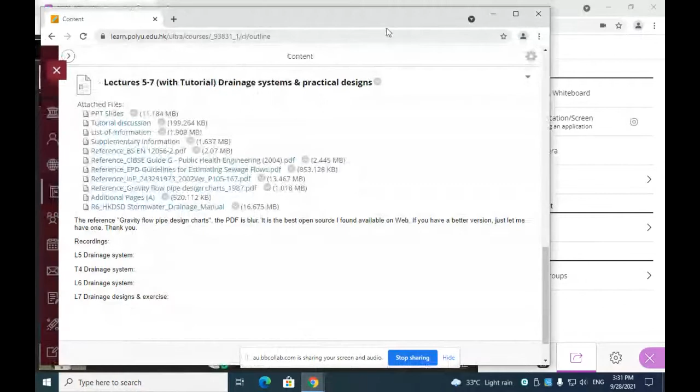For this series of lectures, we're talking about the drainage system, and I put all the information together into one batch, so that you can find all this information from a single location, a single source. It seems there are a lot of files, but only a few I would like to show you during the lecture.

One is the PowerPoint slide, and this PowerPoint slide serves for 3 lectures. Therefore I subdivided this slide into 3 sections: first section for the first lecture, second for the second lecture, and so on. I have also prepared a few questions for tutorial discussion, to be discussed on the 18th, during our scheduled tutorial sessions.

Apart from that, the rest are basically reference materials. One of them is a list of information, which I share with Professor Mui, where all the essential tables and formulas are shown, indicating that for examinations and tests, at least you will have information available as shown in the list of information. There's a minimum of information provided to you.

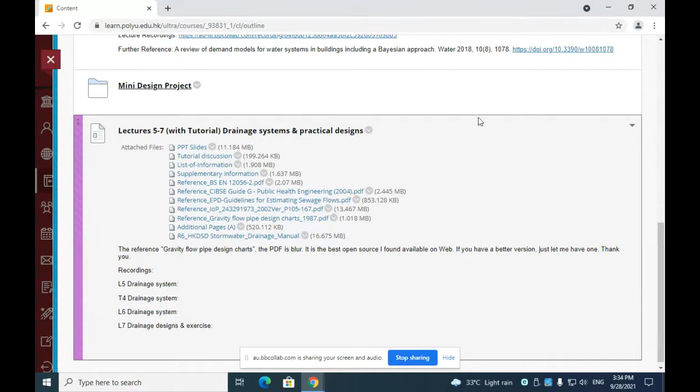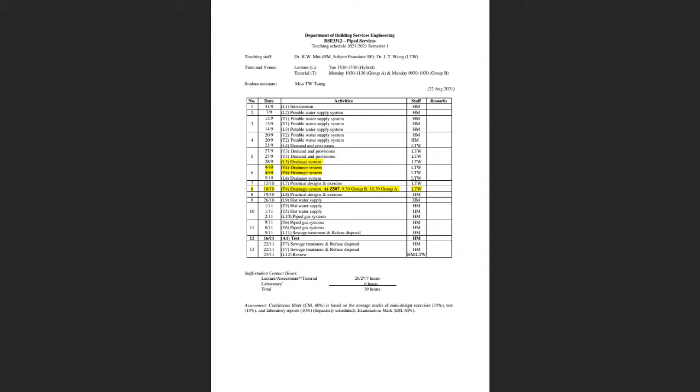Okay, here is the PowerPoint I prepared for today, on a drainage system for buildings.

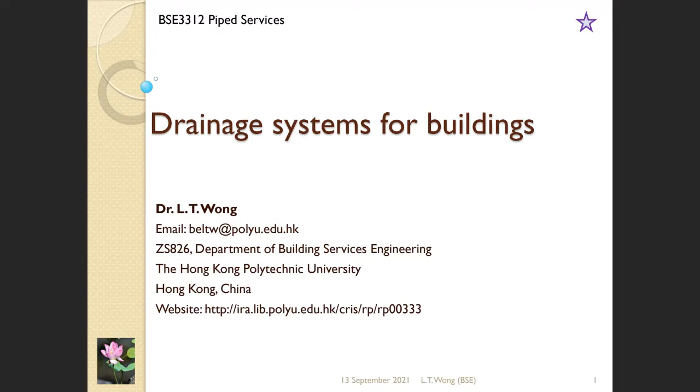Let's go through one by one. Now, we know what's a drainage system. Drainage is basically for a building - we have appliances, we need to use water. All the water comes from somewhere else, and after the application, we will drain out all this water. The drainage system basically helps us handle the effluents generated from our apartments or livable area.

What we understand for a drainage system for apartments: we have the pipes, we have the collecting points. After all the effluents drain out, they go through some process to somewhere else. The entire thing is a drainage from your apartment up to the disposal - quite a huge area. For the building itself, we try to trim the system down portion by portion.

In this lecture, I think we will concentrate on two parts. One is in the building - above ground drainage system arranged for the building to collect effluents from the building. The second part is within the building site, where we need to deliver the effluents to the collecting point - this is underground drainage inside the building site. Basically we have these two parts and subdivisions.

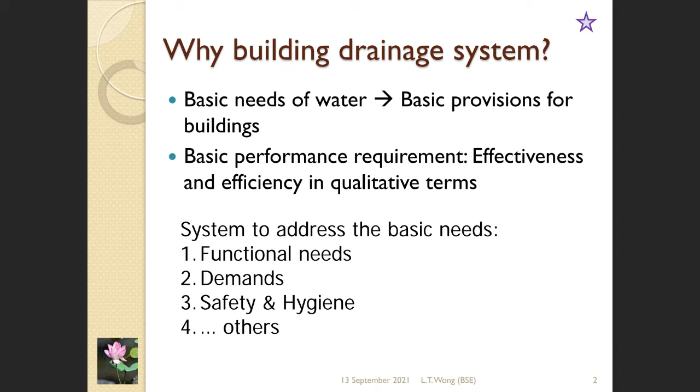So apart from the regulation, we fulfill everything. Sometimes, and most of the time, we will design and arrange the system to fulfill some sort of expectation - the so-called provisional or functional needs. We will quantify all these terms later.

First, we are going to prevent the transmission of foul air or transmission of bacteria and disease into the building. We need to maintain that for hygiene requirement and safety requirement.

The second, we are going to minimize the frequency of blockage and provide adequate pipe access to enable the effective clearance of such blockage, which is a maintenance requirement for a sustainable system.

To provide efficient conveyance of discharge from sanitary, kitchen, and all these spaces and facilities, to enable correct function of each appliance - to maintain correct operation, an effective and efficient requirement.

And where any sewer is likely to surcharge, minimize the risk of flooding. Also maintain good use - normal operation, above ground and below ground level, of course.

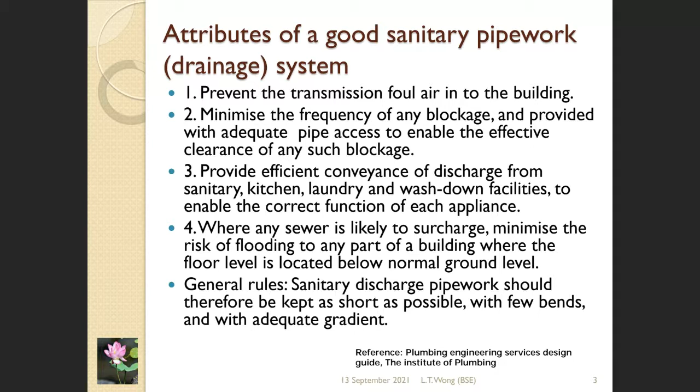Now, for ease of discussion, I would like to subdivide the system into sections, just for convenience purposes - not necessarily subdivided like that. But for convenience, I would like to discuss the system using the ground level and the boundary, dividing it into the above ground part and the below ground part. Why do I try to subdivide like that? Because the flow phenomenon, the discharge behavior, and the fluid dynamics and fluid mechanics will be very different.

For the above ground, mainly the transportation direction is vertical. Below ground, mainly for the slope pipe. It doesn't mean that above ground has no slope pipe - it doesn't mean that, but above ground mainly the transmission is vertical, just for convenience.

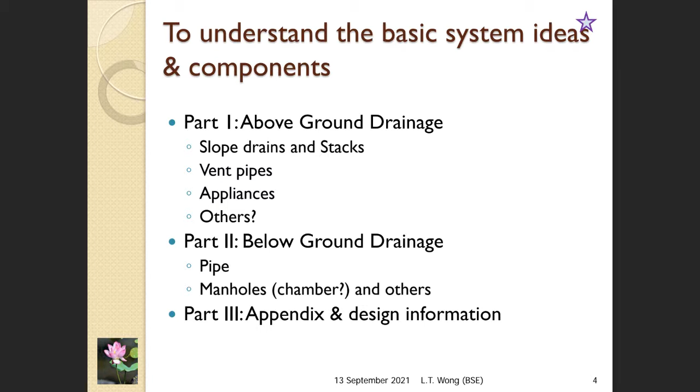Okay, so the coverage and scope of this series of lectures, including 3 parts: 2 lectures and 1 design Q&A, also to show you some design information and a review. Part 1 is above ground drainage today, next week below ground drainage, and then the week after. Therefore, part 1.

The basic idea in the slide showing here is we try to have a brief classification of systems, but the classification of systems is not so systematic actually, at least not systematic to me. When I was a student, I felt very confused about that.

But I try to pick out the basic idea for classification purposes from various textbooks. The first one: the separation of effluents. This is actually for the processing, the further processing. The example shown here is we separate the effluents coming from soil appliances and from waste appliances, whose water quality are very different. One from the water closet, more dirty water - some textbooks refer to this as dark water or black water. From the water closet you may know it's bidet or similar.

In contrast to the soil appliances, we have the waste appliances. Relatively, those effluents are less dirty, and some textbooks refer to those as gray water in terms of color, such as from wash basins, baths, fountains, showers, something like that. The classification of these two is because the processing and handling will be different - maybe handled by different discharge pipes in the building, and then they join together somewhere else, or go to a final destination for different water treatment processes, depending on the final process. But anyway, if we are going to separate the effluents like that, that's the idea.

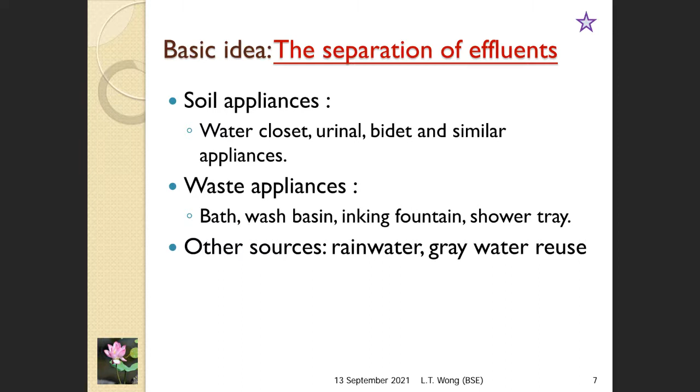Other sources apart from the appliances - we probably have rainwater as one of the sources we use nowadays, and we have some recycled water as well inside the building. So apart from the two different classes of effluents, maybe we have more in the actual building. According to this idea of separation of effluents, we can arrange the system into different outlooks, different appearances, such as the so-called two-pipe, one-pipe systems.

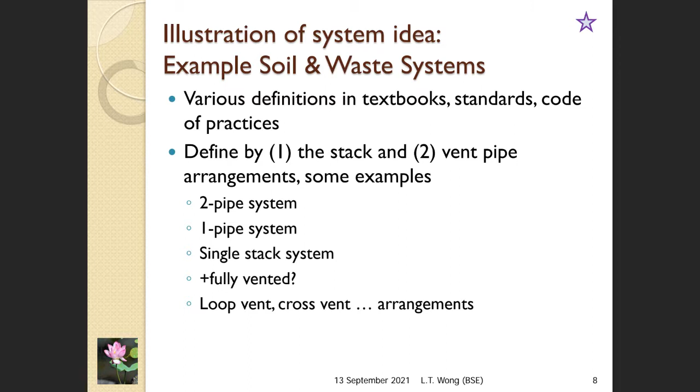I think we'll just go for the example, the so-called two-pipe and one-pipe systems. However, unfortunately, the definitions for two-pipe and one-pipe are not so rigid. When you look at design guidelines and textbooks, you will feel confused. Just to put an example, a very basic idea: if we are going to separate the effluents coming from soil waste and wastewater, this becomes a so-called two-pipe system. The pipe is referring to the drainage stack - a stack is actually a vertical arranged drainage pipework.

And with this, I've got the question - why did they join together finally? The separation is only applicable in this example, applicable inside the building only. The routing for the pipes may go through different locations with different requirements, so that the processing, including the transportation, is different. But anyway, this illustration tries to illustrate the idea of separation of different effluents into two different stacks - the so-called two-pipe system.

In contrast with that, they can be arranged together, becoming a so-called one-pipe system - a single pipe collecting both classes of effluents as well. That's fine, that's okay. I use the screen here - this is a one-pipe system as well. Thank you very much.

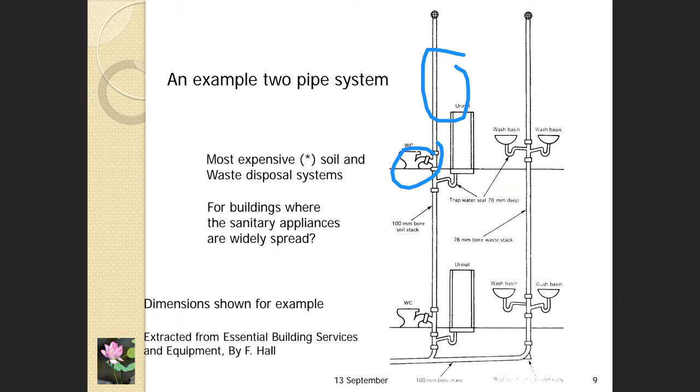Apart from that, here's an additional pipework. This pipework is not for water, no water can flow into it, and this also serves as a ventilation pipe. This additional ventilation pipe is so-called the secondary ventilation pipe. If the pipe is arranged vertically, usually we refer to it as a ventilation stack, something like that.

So we have the basic idea and the components mixed together in order to have the classification of the system.

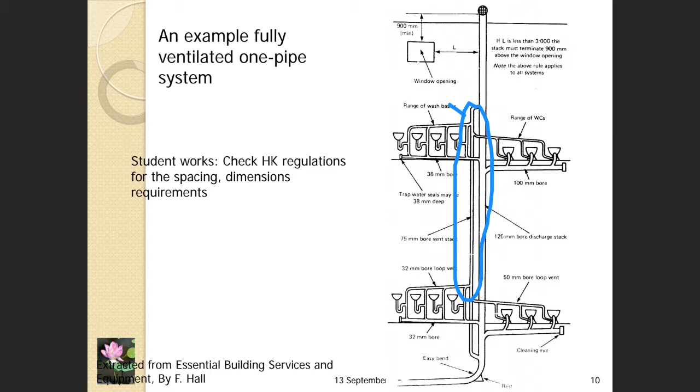Please do not use terminology like 'my design is a one pipe system.' Actually, for a one pipe system, you need to describe further, to better define how one pipe your system will be, because there are a lot of variations.

Okay, we skip this, go to the design guide. I have uploaded the entire design guide I found from the internet. Don't charge me, no copyright - okay, not the copyright.

Now the definition I quote from the Institute of Plumbing, which is a chartered institution, so I think it will have some status. Now, the primary ventilation system - the ventilation is supplied by the drainage stack itself, as arranged in the figure there. All the ventilation from the drainage stack, ventilation is from there. It's primary ventilated. The description is there.

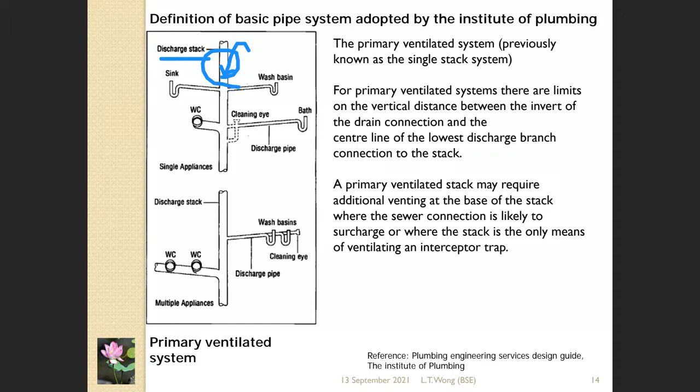Apart from that, we also have the basic piping for secondary ventilation. Apart from the primary ventilation, we are going to have one more ventilation stack acting only as the common connection to the ventilation pipe, could be like that, and to vent some of the locations inside the pipework.

In the case where the ventilation is insufficient, we need secondary ventilation as well. And if arranged differently from the previous one, they call it so-called a modified one. Modified is also a confusing word, not well defined - deviating from the previous one is so-called modified, and how modified it is, we need to further describe.

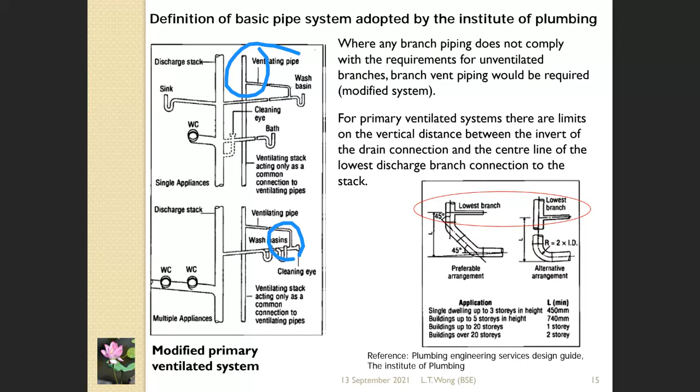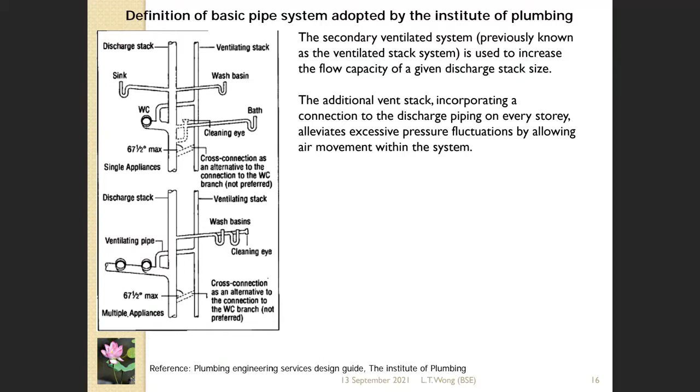Now, the secondary ventilation system - this is a secondary ventilation pipe, and the ventilation connects to various locations where needed, particularly for the WC, as they require much more air. Here's some definition.

The ventilation location could be at the appliances, could be at the drainage stack, could be at the branch pipe as well. So now we've got different alternatives. However, for the alternatives, somewhere has to vent and somewhere not to vent, which we need to go through experimental study to see whether the seal loss will occur.

Okay, for a pipe with a limited length, more than that we need ventilation, something like that. Mainly these dimensional requirements come from experimental data.

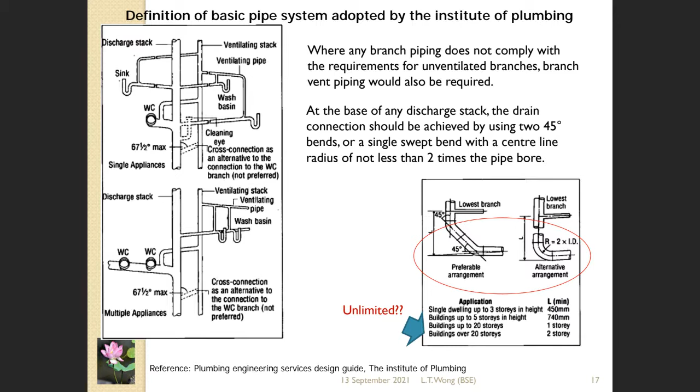Can we calculate it analytically? Theoretically it's almost impossible - some solutions are not available in analytical form, only available in numerical solution. Therefore, as engineers, we will not spend a whole year to solve for one pipe size, but rely on experimental data to design an entire building within one week, things like that. Performance requirements we did mention - simple, safe - so we will not go through it word by word.

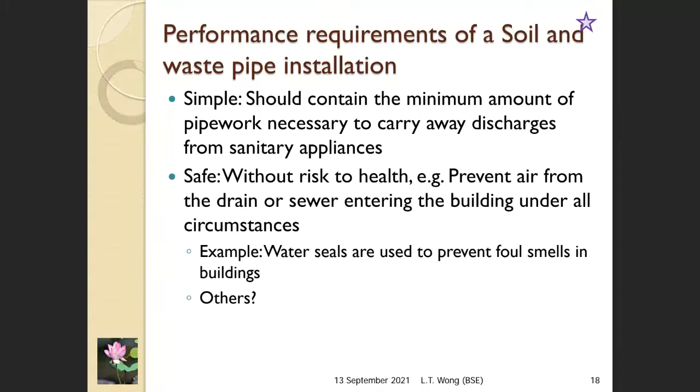Apart from that, we also have some technical aspects. Let me give some more description on these, such as the flow requirements we've talked about, the smell and foul air which require ventilation. I did receive some calls from local developers talking about the bad smell.

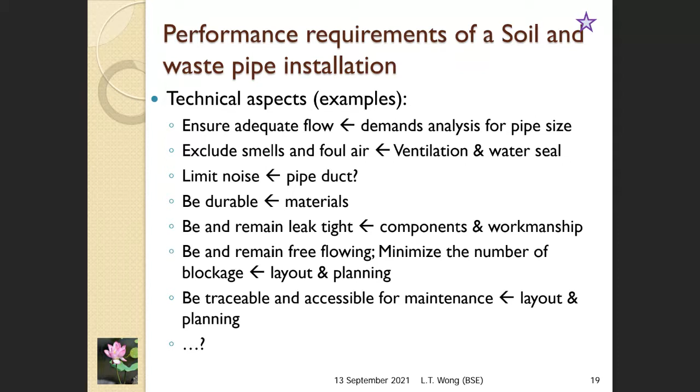Be durable material, be maintenance. We can conduct the maintenance easily to replace the system easily, okay? The system be traceable. We can trace the pipe work, where the pipe works, and once there's a leakage, how to repair. All these are important, subject to these so-called technical aspects.

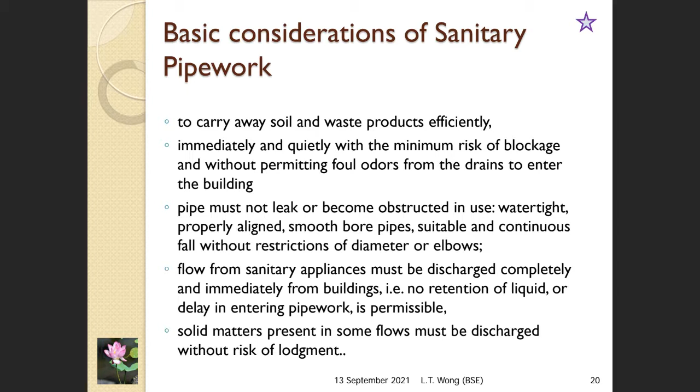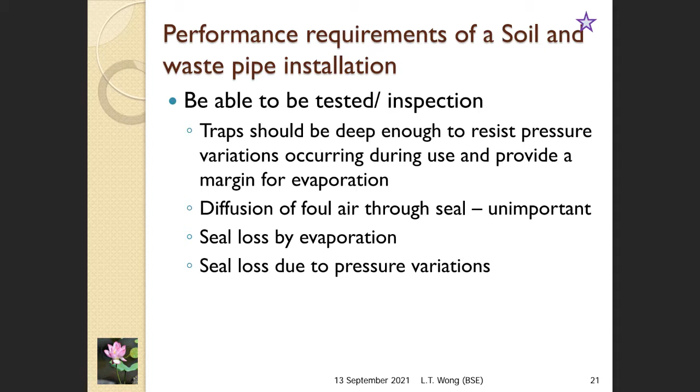Okay, we skip all this. Be testable, okay? We need to provide some space for testing the pipe work, for the leakage, things like that. We skip all this because it's quite detailed, you cannot read the wording.

Okay, now we go to the details about the piping arrangement. For the piping arrangement, we are subject to various philosophies, apart from those basic assumptions and parameters adopted. Common to all those requirements, we will have different appearances of the piping layout. Therefore, I would like to stick to a few layout examples to serve the purpose of discussion.

Here is the example of the piping arrangement in Hong Kong, and we will refer to the documentation detailing the piping, such as the source, the Buildings Regulation. In the Building Regulations, Chapter 123 is the Buildings Ordinance, and the subsidiary 123I, not 1231, which is for the drainage system.

Apart from that, because the Hong Kong legislation system is performance-based, performance-based means it will list down the requirements qualitatively, not necessarily quantified, so that it allows an engineer to, based on engineering principles, provide a solution to address the performance requirements. This is the local legislative system.

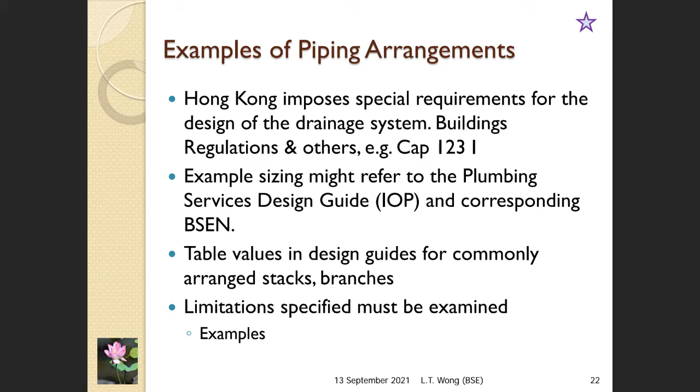Now I'd like to show you information from the British Standard first. The British Standard is interesting - this is the so-called BSEN. Maybe later, because Britain has separated from mainland Europe, there will be no more EN. I don't know, but the point is this documentation, the BSEN, has an objective to provide unification of a standard across borders in European countries.

Therefore, inside the BSEN, they define different kinds of systems and document them so the documentation could be applicable across different countries, different nations, different areas. Okay, maybe I'll jump to the last one first.

Now in the BSEN, they try to classify the system into 1, 2, 3, 4. This is not the classification of the BSEN itself, but system 1, 2, 3, 4 describes the basic underlying assumptions adopted by different nations. For example, Germany, Austria, Switzerland, Belgium will adopt a set of underlying assumptions in order to lay out the pipework.

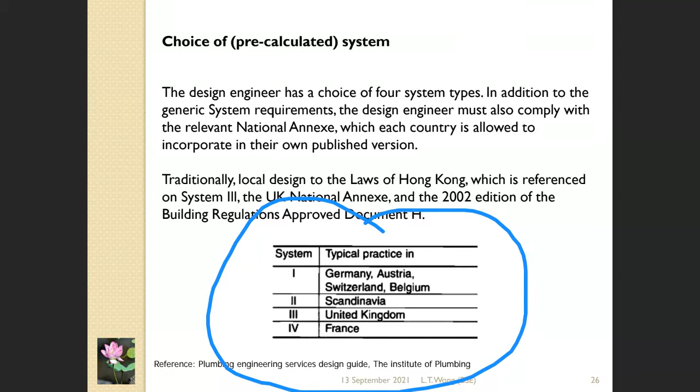For Scandinavia, they have another idea to lay out the pipework. For the UK it's system 3, for France system 4. Maybe for some other countries, system 5 and 6. But basically it's classified into 4 systems, and the differences are based on this.

It's based on the filling degree. The filling degree is the idea of how a branch pipework is to be utilized. The filling degree actually refers to once we have the effluent discharge through the branch pipe, something like that.

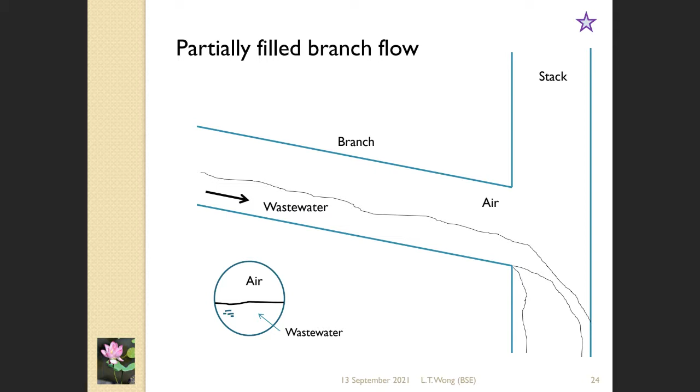Actually, indeed, all the water flowing through the pipe will most likely not occupy the pipe entirely. We allow some space for air flow, and this air serves for ventilation. It could be partial filled flow, not necessarily fully filled. And the area filled up by the wastewater is described by the term so-called filling degree.

If the branch pipe is allowed to fill up by 50%, this becomes system 1. 70% becomes system 2. 100% becomes system 3. Other than system 1 to 3 will be system 4. Therefore, system 4 is not well defined.

Now on this classification, the basic idea is we can appreciate that even the same pipe, same appliances, at different countries you will find this appliance's pipe is smaller. In another area, the same arrangement, the pipe seems larger and longer.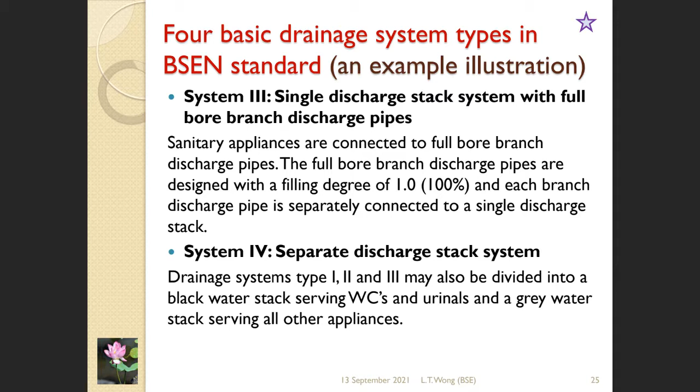Actually, the arrangement is based on experimental study and data arrangement, so this set of design can fulfill the above mentioned requirements. So based on 1, 2, 3, 4, we do have different sets of piping layout. The differences are there. So here we need to confine our discussion, otherwise it's too confusing.

We try to confine later on the British system, and I think it will be easier for you to follow one of the design guides. All right, but before that, I would like to illustrate the entire bigger picture for you.

Now the primary ventilation system configuration, as we mentioned, primary ventilation comes mainly from the drainage stack, and the ventilation mainly comes from the extended part of the drainage stack up to the roof level, above the roof level. The regulation nowadays requires the exhaust point of that pipe opening to be above all the occupied area, at least a certain distance above the roof - 1 meter, for example. But maybe recently we found 1 meter may have some problem.

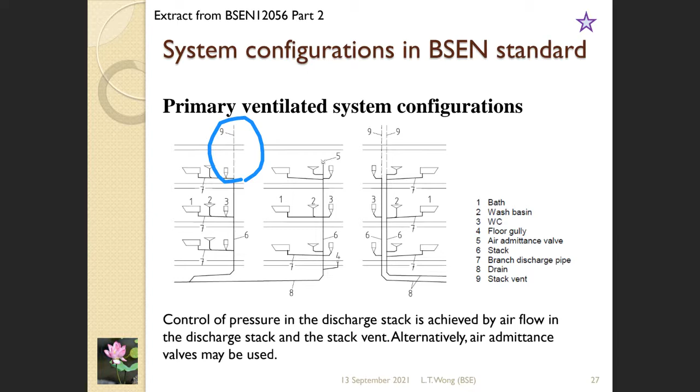Anyway, in the British standard, apart from the primary air from the drainage extended part, it also comes from some components. These components are not necessarily approved by all cities, not universal. This is the so-called air admittance valve - just like a non-return valve, air can come in one way, no air can go out. It puts a physical isolation. This is allowed in some European areas, not for Hong Kong until this moment.

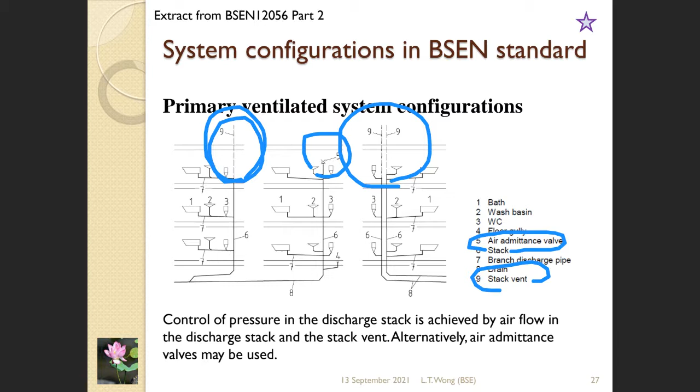Apart from that, if you've got a two-pipe system, the extended stack up to the roof level is called the primary ventilation. So this arrangement is so-called the primary ventilated system. Apart from that, we have secondary ventilation - additional vent pipes are provided. They're joined together because both are vent pipes.

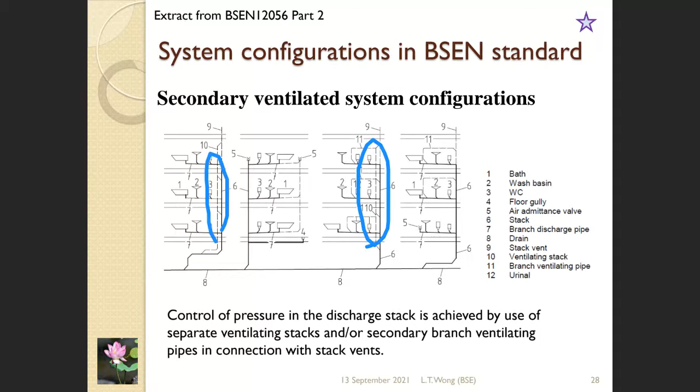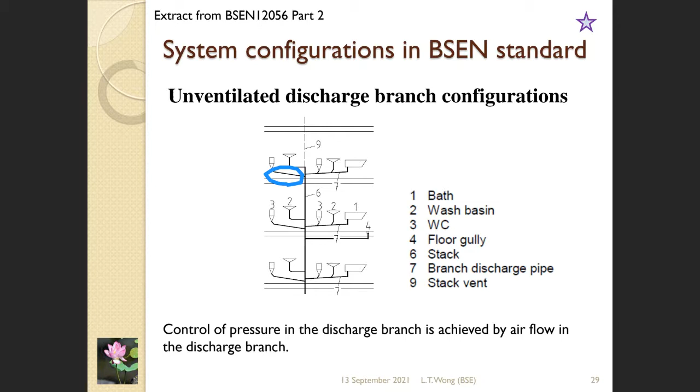Unvented system - unvented parts are not the system. The unvented part we found here is the branch pipe without any ventilation. It's possible, but it has limited length. Longer than that, we have to supply ventilation.

And for the branch pipe with ventilation, it's depending on the length, the gradient, and pipe size. Having ventilation, the pipe can be longer, with less restriction about the pipe routing. With no ventilation, we have more strict requirements about pipe gradient, pipe diameter, pipe length, things like that. So this classification helps us use the correct set of information to lay out the pipework.

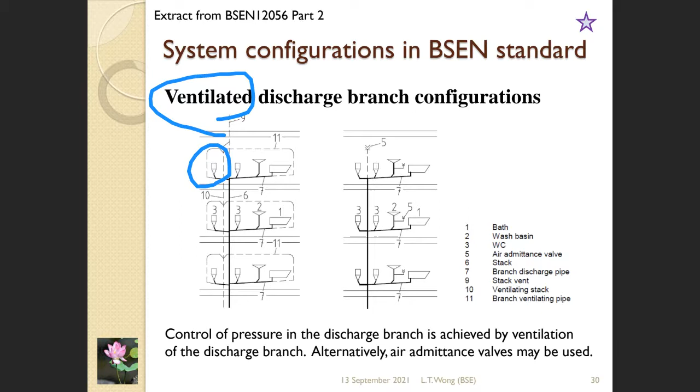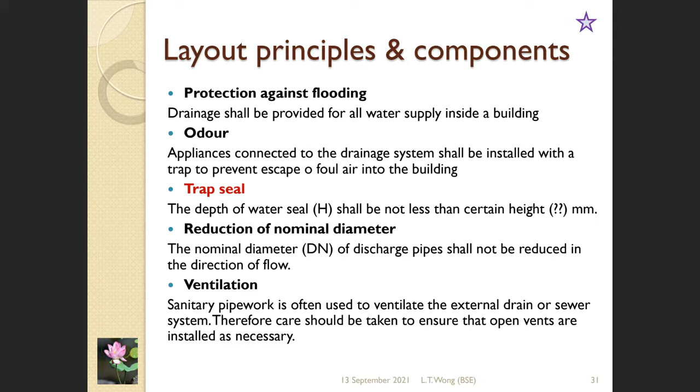And then here we have some list for us detailing the terminology and standards. We skip this. Trap seal highlighted - I will give you more details about that later.

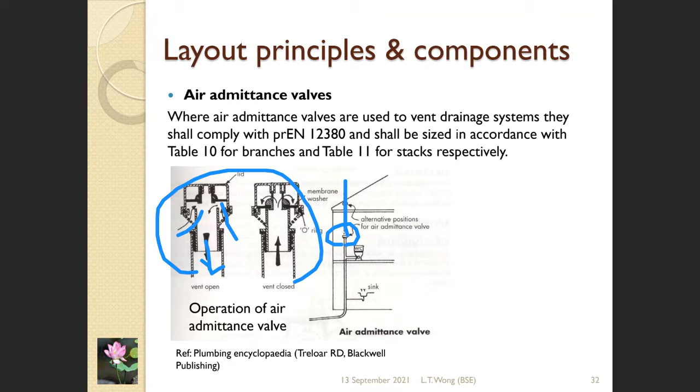Now, for the classification of the system and the layout principle, the layout details will be listed in table form. According to the system arrangement, the system underlying parameters adopted, we have different parameters for the system. Here are some example tables, such as the air flow rate for ventilation and the drainage capacity of the stack.

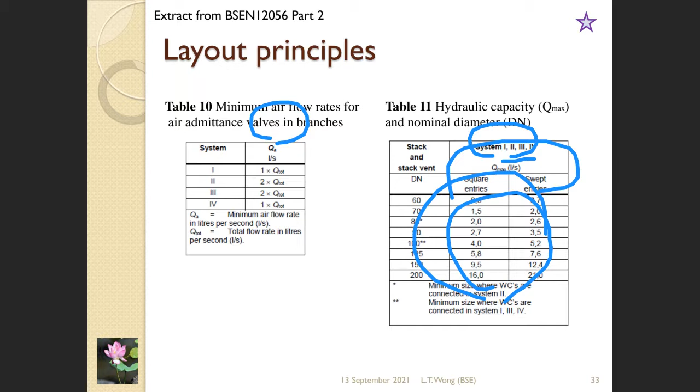For points 1, 2, 3, 4, put them together. In there we have two columns. One column is a square entry, one is a swept entry. You can find the definition for that. Basically, square entry is where the pipe is just fully connected to the stack. A swept entry has a smoother water flow.

Better, it smoothly flows the effluent into the drainage stack. The difference is that it creates less pressure variation, so with less pressure variation, the drainage capacity will be larger compared to the square entry. We are not talking only about the filling degree at the stack, but also the air pressure generated inside the system, so we consider both complications there.

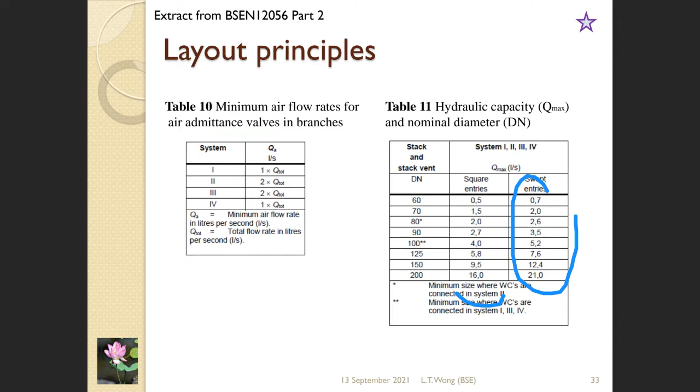Here are some requirements about the waste trap arrangement. The waste trap should basically be close to the appliance, but for some appliances, according to its arrangement, it may be a little away from the point of utilization, such as the shower, where arrangement may not be so convenient at the point of drainage. They are allowed some distance.

Apart from the water seal part, the figures are not shown here - I put an additional information here. Separately, for point number 3, the so-called proprietary valve, it's something like this.

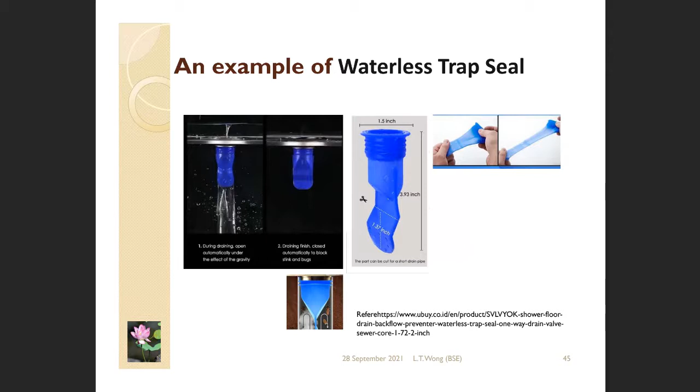Now, the purpose of this waste trap is to provide a non-mechanical barrier to prevent the escape of foul air into the building. In addition, the water reservoir can act as a dilution feature to intercept small accidental drops of objects. The description is like that - let water go, but no foul air in. That's the idea.

There should not be more than one trap - that's the principle still applicable in Hong Kong. We have only one trap between the appliance and the drainage stack. Why not two? Because more traps means more risk of blockage. Once blocked, the wastewater comes out, causing a hygiene problem worse than the additional trap would solve. So this is a balance.

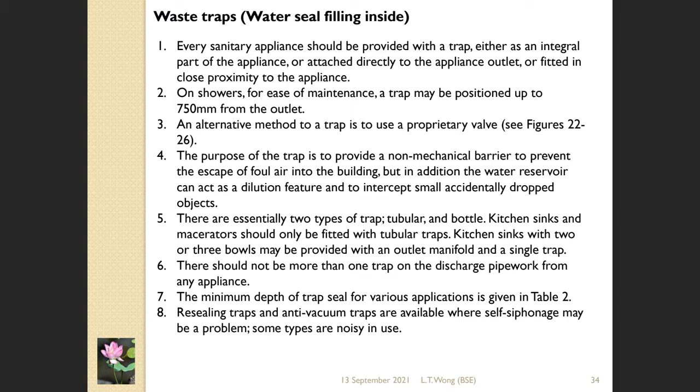Okay, the minimum requirement is 37.5. This is a magic figure. Whatever the trap seal design, after the operation, the water will follow the wastewater to flow, and then resealing - after resealing, we have to maintain the minimum height of water inside the seal.

And this height of water actually will create the pressure of the water column. So that on one side, air pressure variations have to go through this column of water before the air can pass through it. So this height will create a sufficient pressure, and the pressure corresponding to this water column becomes the density of water multiplied by gravity multiplied by the depth, rho GH.

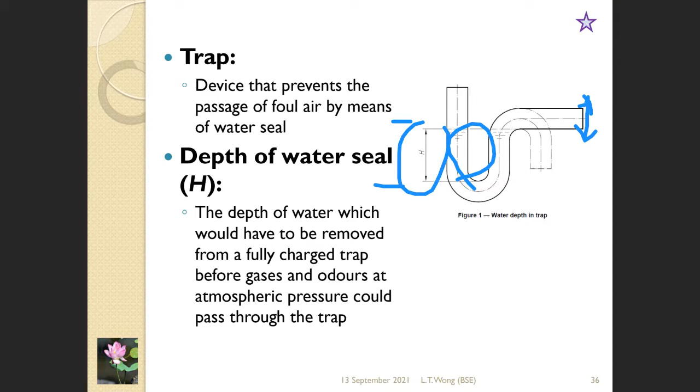Therefore, approximately for the 37.5 mm, it's approximately 375 Pascal, plus or minus. And for engineering accuracy, we will mention, say, around 38.

Okay, why do some appliances have a deeper water seal? Because for others, say for the WC, there's a flushing action. The flushing having quite a large momentum, and this momentum will cause seal loss. Seal loss means some of the water follows the flow and discharges to the stack. Insufficient water to refill, to backfill the trap, so that the water seal drops.

Therefore, the standard for the seal depth inside the trap has to be designed deeper, in order to compensate for those situations having water loss.

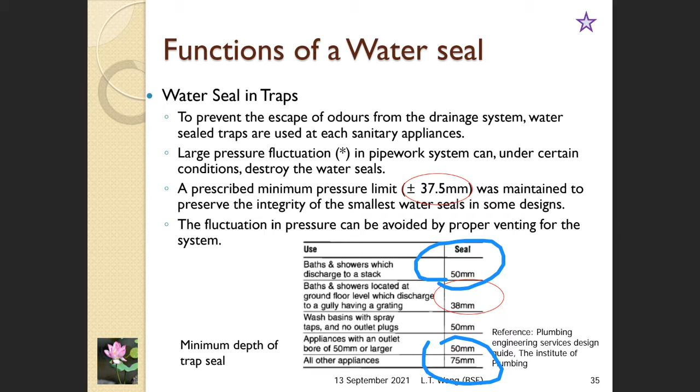All right, we're talking about the loss of water seal. There's a lot of causes. The main cause we have to avoid is siphonage action. Siphonage describes the water withdrawal or water loss due to excessive pressure variation, and these excessive pressure variations can be induced, can be created by the discharge action of the appliance itself.

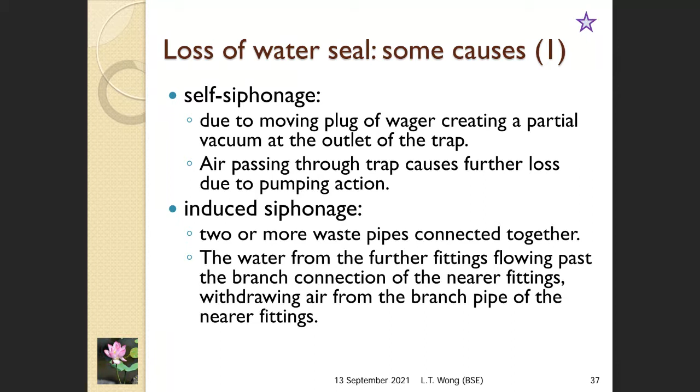The classification here is just a description: self-siphonage and induced siphonage, both talking about a siphonage action. If the siphonage is due to the appliance itself, it's so-called self-siphonage. If the siphonage action is due to the discharge of other appliances - the water seal trap has no discharge, but the discharge comes from appliance A while the siphonage action is created at location B and C - that's so-called induced siphonage. Whatever the case, induced or self-siphonage, the principle remains unchanged, the same.

Now for the discharge action here, with some arrangement of pipe length and gradient, the water starts to flow in. Because of gravity, the water will accelerate, and keep accelerating until the friction created by the pipe counter-reacts at the same magnitude as the acceleration due to gravity. Then the water flow becomes steady, at the same speed, a so-called terminal speed or terminal velocity, which is a balance. Now, because of fluid mechanics, in a partially filled pipe the flow velocity is different from an entirely filled pipe.

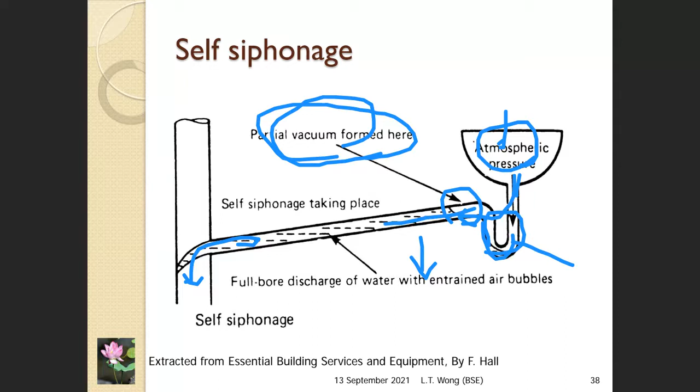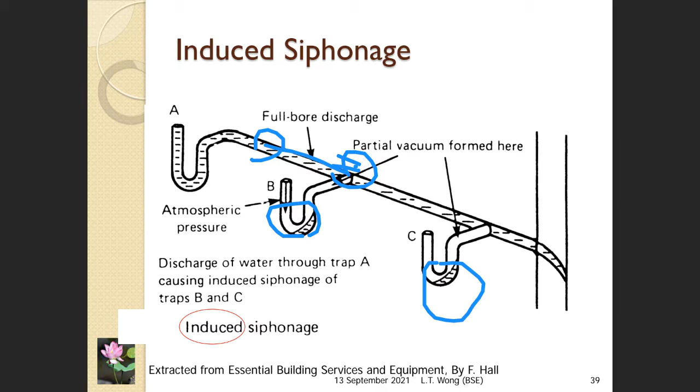Similarly, this partial vacuum area will transport through the pipe, flow through the pipe, such as from one location to a second location. Once the partial vacuum goes through, all the traps will be affected. The partial vacuum isn't necessarily with water - sometimes it's with the air wave, the pressure wave, transporting through the entire pipework. All the seal traps connected to it will be affected.

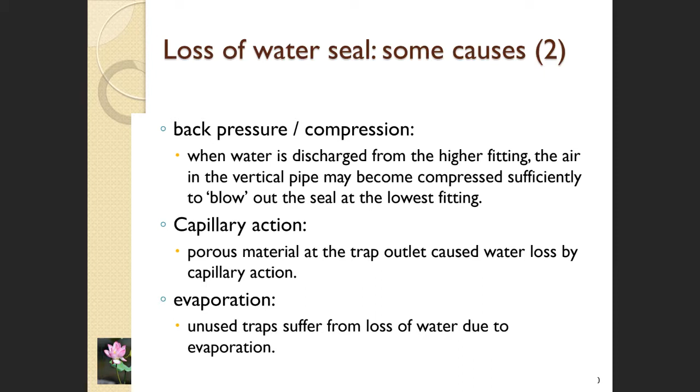Apart from the siphonage action, we do have some other possibilities to the water seal loss, such as back pressure. Back pressure will be okay. We need to ask, where does the pressure originate?

Change of the flow rate inside the pipe. For steady state pipe, usually we do not have pressure transient created, unless we have a change of the flow rate or change of direction. Here there is a change of direction, also change of flow rate. Same flow rate.

Okay, flow velocity, because the water comes here and drops, the terminal velocity is different from the sloped pipe. Also more water comes, and here the flow is slower. This is what we call a hydraulic jump.

Hydraulic jump means there are some locations, some pipe locations, that got entirely filled up by water. So as the water continues to jump into that area, it will create a positive pressure in some area, particularly at the main drain, building main drain at the bend location. Therefore, in the previous table I showed you, at the building base, the bend has to be large or specially arranged in order to mitigate or minimize the effects due to the positive pressure.

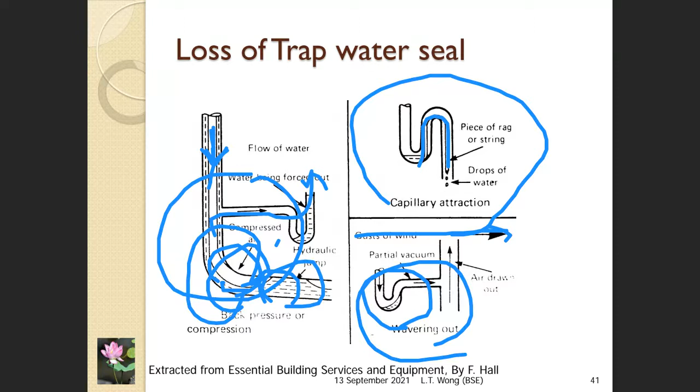Same equation: wind passing through it will create a negative pressure. The negative pressure, if large enough, would affect all the seal or water seal. So just some description for that. Wind pressure, the same equation, rho v squared. V is the velocity of wind, rho is the density of air. Discharging momentum may also affect it.

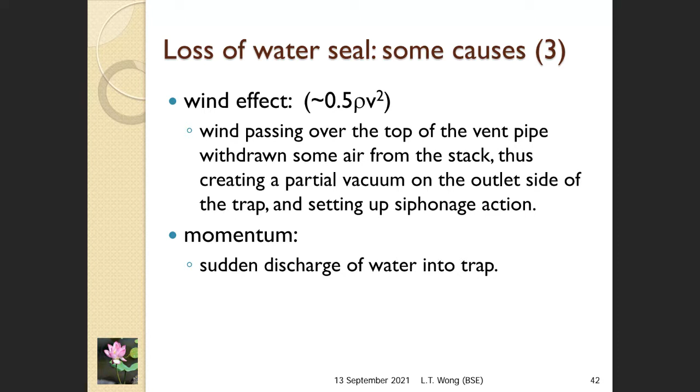I do not go into the very detailed mathematical calculation. This is unnecessary because for this part, we're talking mainly about the design of products.

Apart from that, okay, we have a design called a resealing trap. A resealing trap is a special design which cannot entirely avoid the negative pressure, but the trap is designed to have several spaces to reserve water inside. Additional water will allow the air to go. This additional water, when it reseals the trap, can still maintain sufficient height of water seal. This is a special design.

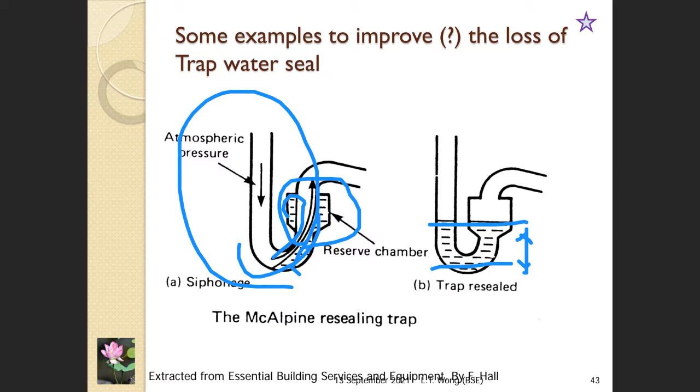Here is just one example. Not only do we have a McAlpine resealing trap, we also have some other designs, such as the next one. Okay, this is the next one.

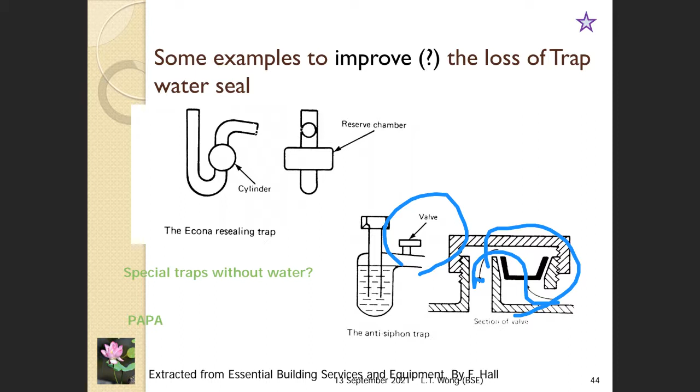Okay, this we can skip.